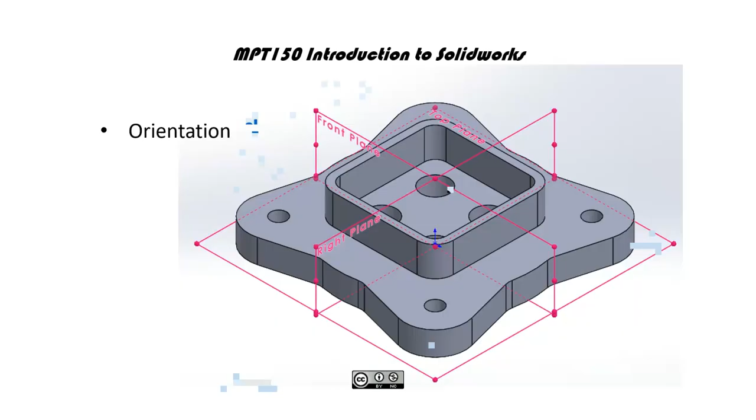Problem 4.6, millimeters, grams, and seconds. Part origin is located as indicated, so bottom center.

Based on the isometric, we're going to be sketching in the top view, using line, center line, circles, sketch fillets, extrude boss base, and extrude cut. All right, so all of our standard features are in play.

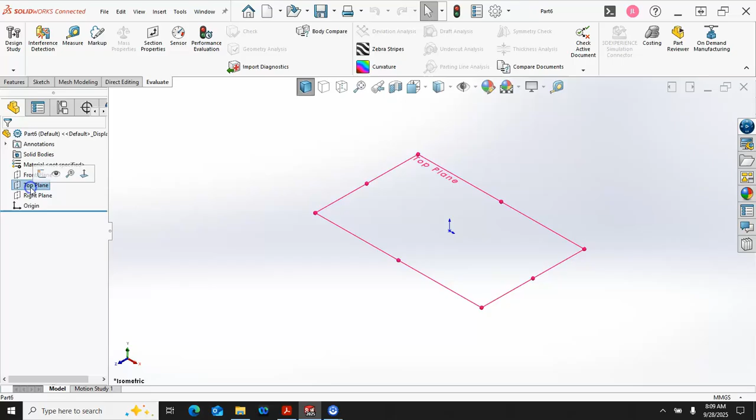We'll zoom that out a little bit. And then on the sketch, make sure we're going into millimeter, select the top plane, go into the sketch, and let's see if we do this.

All right, so the bottom view, the top view, I think I really just want to do that starter section. We have, we can do mirrors. Let's see, we have the fillets.

Let me fly this back in here so we can look at the dimensions. I got ahead of myself. So this has kind of a circle to it. I am not seeing... there we go, radius of 80 is typical.

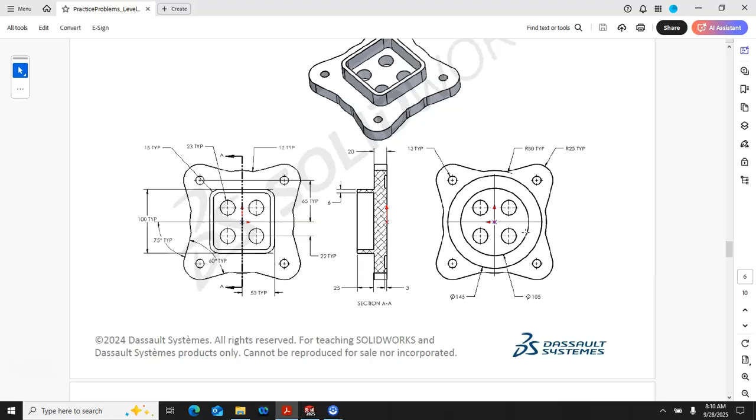So if we do this kind of butterfly shape first, radius of 25, typical, 105, 145, and then the top is the square. So really this view minus the boss and minus the undercut will get us a majority of the geometry. So the radius of 80 was what I was looking for there.

And let me expand that out a little bit. All right, so let's go ahead and put in the dimension.

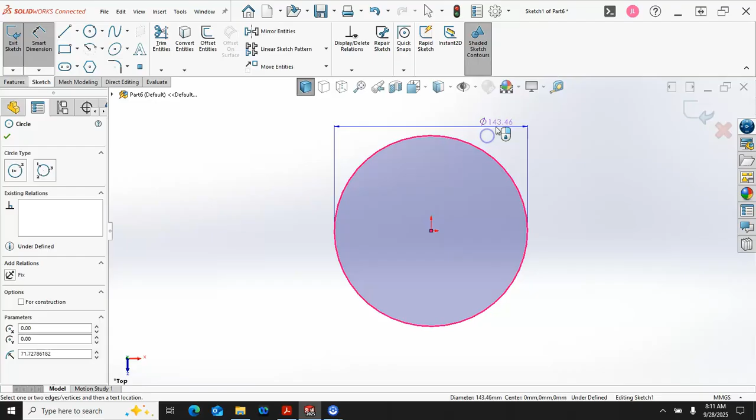I'm going to be working with contour and region. We'll go 160. Not going to let me select it when I'm in the dimension, but if I select it after I've hit escape, then I can switch it over to the radius.

The outside geometry then, let's go ahead with center lines because I'm thinking mirror. Don't think there's any advantage to treating this as a circular pattern.

So, oh, that's interesting. Oh, I switched it to horizontal too quick. I hadn't finished applying it yet, so that does happen if you get ahead on the buttons. So I need to make the next one horizontal, not try to make one that is already vertical horizontal.

All right, so the last one, after a few clicks, did update the center line. So let's see, what do we have? 65 typical.

So if they're going to say typical, we're going to go 65 and 65. And that's okay that it's to the outside, but if those are tangent touching, that could create a little bit of an overlap. Let's see, 15, no, that's not that one.

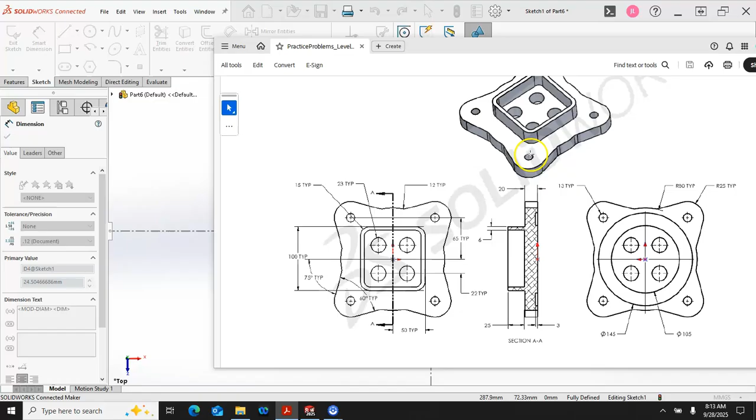Need to find the diameter, so 23 typical, but that's a lot bigger. And I'm not seeing any... there we go, 13. Hiding in plain sight again.

All right, so let's make sure that we are inside of the text box and we go ahead and accept. And since that was bigger, that gets it away from my geometry. Let's see, radius of 25.

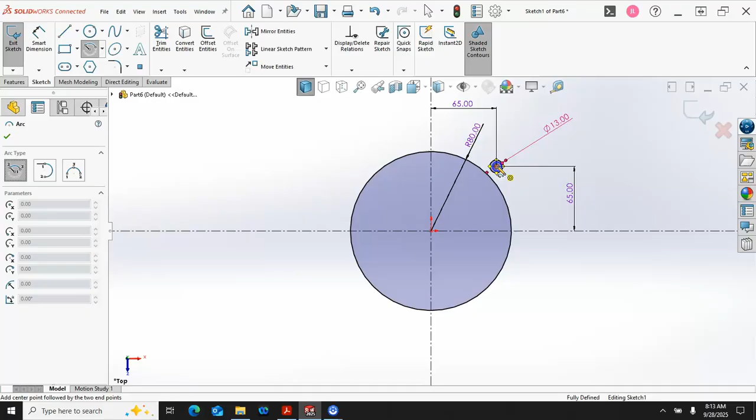So let's, I'll double check. I am center point arc. And so we need that partial. If it goes the wrong way, just keep dragging. And that will generate our shapes.

All right, so we're given 60 typical. So I'm going to probably need one more center line that goes into the geometry so that I can make those two endpoints symmetric.

So selecting the endpoint, selecting this construction line, center line, and making those symmetric, that will keep them in play. We do want it to be tangent, and I don't necessarily need to connect those just yet. We'll come back, and why don't we make them symmetric first?

So select, control, select, symmetric, and then if I go coincident, the other one should follow. All right, so our radius then becomes the 25, and pretty close.

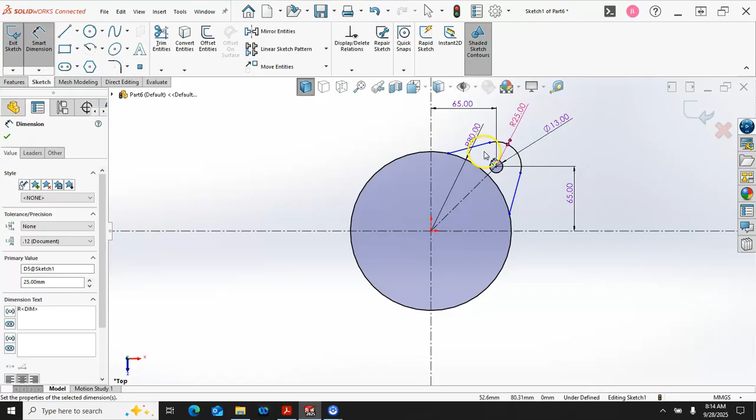Then two non-parallel lines for our dimension and place it. Those become the 60. All right, so it could have been a circular pattern for instances.

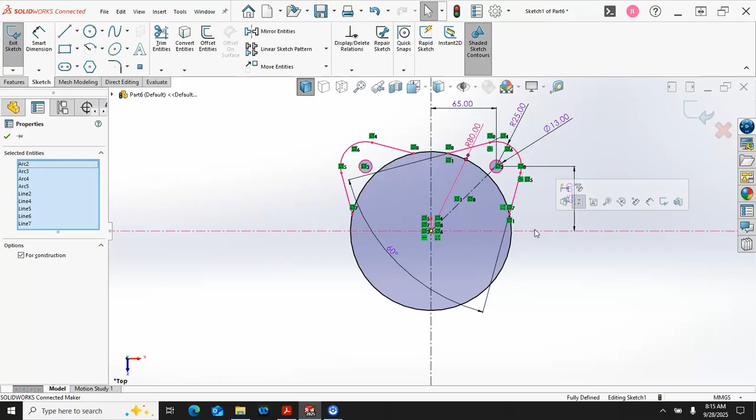I'm thinking mirror, so select. All right, this one's going to be a little bit more, so I'm going to go left to right so that I don't get that center line, my extra geometry, and then the horizontal center line will allow it to mirror the opposite way.

All right, so this participates here, and I'm not getting regions, but I'm not seeing any gaps. So as long as the extrude lets me have those regions, let's see, do I want to do the holes in the center? Yeah, we'll go ahead and drop those in.

These could be separate features if there was a chance that they would change, but 23 on the diameter, and they are, let's see, 22. Typical.

All right, and if you saw that little R pop up, that's because the center line is saying it's going to act as radial, or it's going to stay in radial until I either hit escape or close the command. So select, control, select,

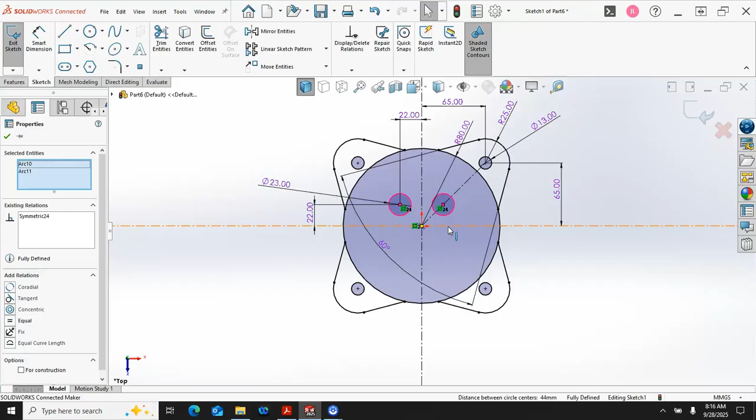and mirror. All right, now we have enough to extrude, and the selected contour and the center lines are not participating in this one. It is giving me the closed regions. So now we just need a height of 20.

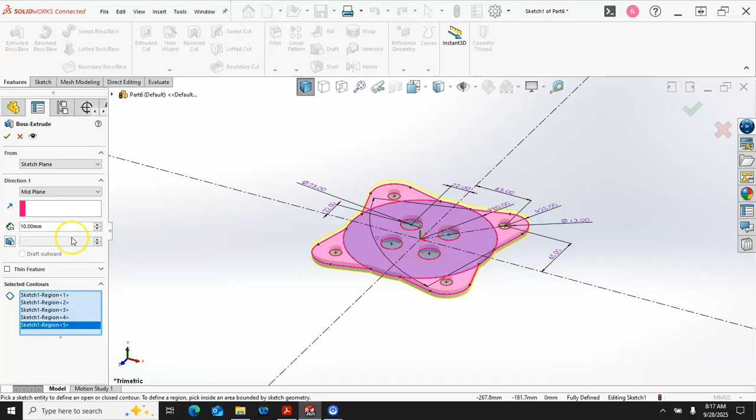Make sure that you're double clicking or clicking in the box, and that was on the bottom, so we want to make sure that it goes blind and up. So our end condition is set to blind, and then we are going in the correct direction.

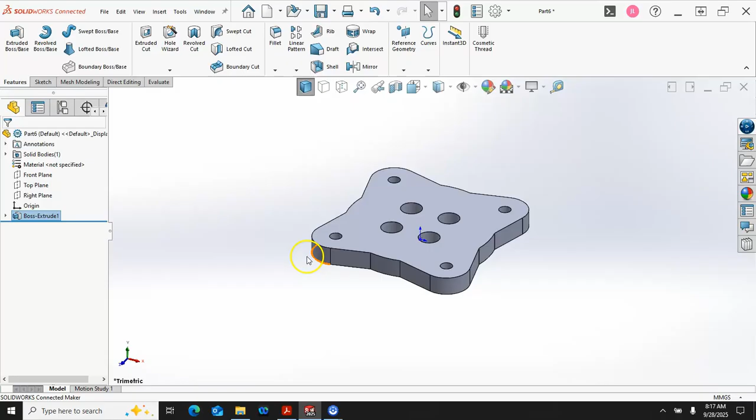All right, so this one I think we can probably use an offset. Did we get... and overall was the 50, so 100 by 100. I probably will just go with the center rectangle.

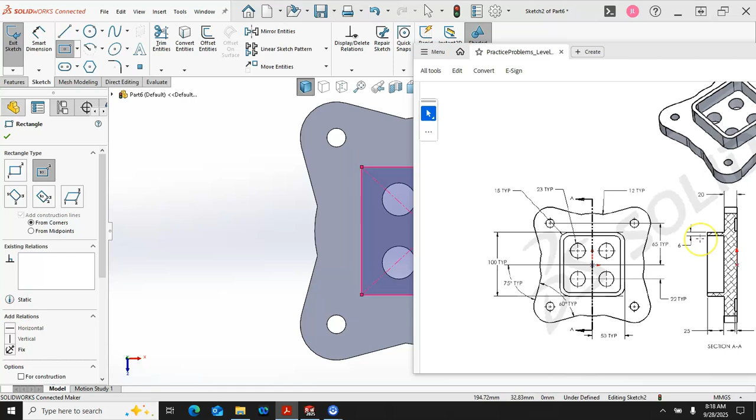And then the thicknesses, have the radius. Need to bring this one in 15. 50 is to the outside. Oh, 6 is in the section view. So okay, let's go ahead with that.

I think I will go ahead and put the radiuses in so it can calculate the internal for me when we do the offset.

So 100. Design intent, I will want these to always be equal. So rather than putting in the 2 dimensions, we'll just set it to equal. And then the sketch fillet gets the 15.

And yes, we know, and it's, well, sometimes it does that for every one of them. Okay, every other one of them. But basically what it's saying is because these center lines are providing the relation and there's equals, it is just warning that if you don't do all of them,

that it is going to shift, it is going to be skewed. All right, so let's select the chain, and that was the outside dimension. We want to go 6 millimeters, and then reverse the direction and hit OK.

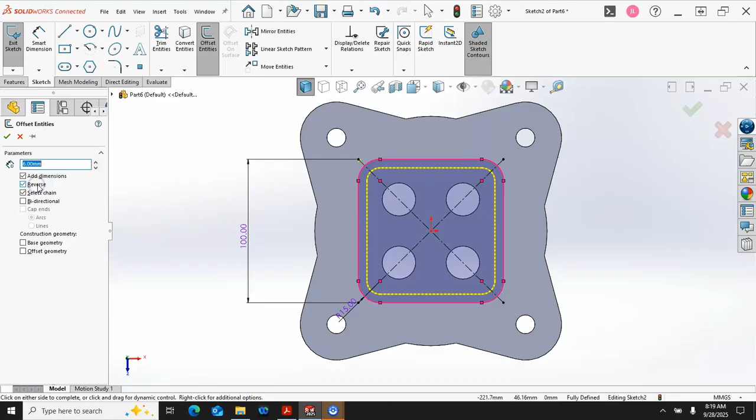So that is going to, let's go Control 7. I want to see my view, and that is going to go 25 millimeters.

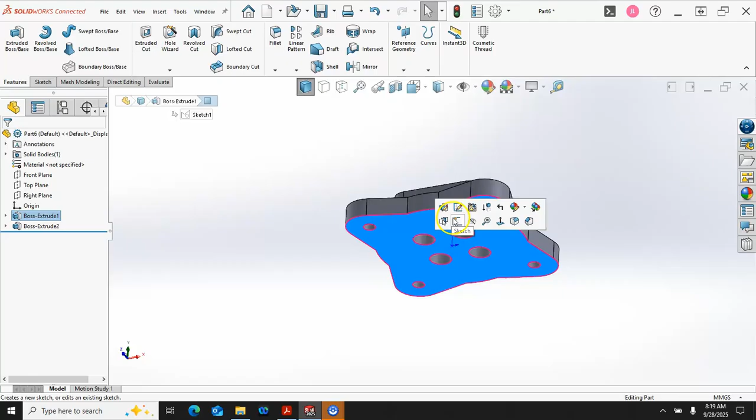All right, and then on the bottom we have the undercut, so picking the face, going into the sketch, we need 2 circles, and let's figure out which dimensions they've given me.

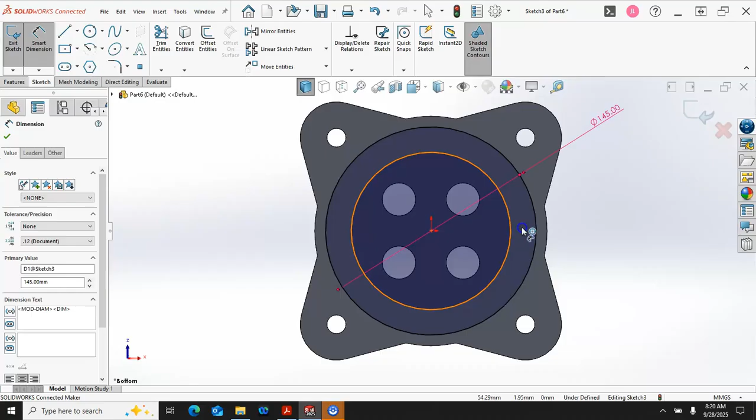So 145 on the outside and 105 on the inside. Okay, that looks pretty good. And then the depth is 3 millimeters.

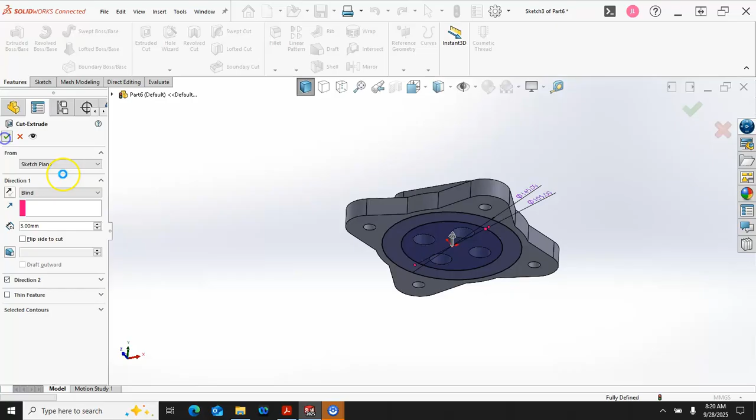Make sure that I'm doing a cut, instead of looking at the boss going, why is that a boss? Nope, it's not a boss. So 3 millimeters and accept and Control 7.

All right, so don't see any chamfers, any additional fillets or radiuses. So let's save, and we're going for 6.

And we have a value of 554,745. So 551,393. Okay, we're in the ballpark anyway. So...

Yeah, 23, 20, 12. Oh, there is just one more. Okay, so there was the fillet I was looking for. So let's go

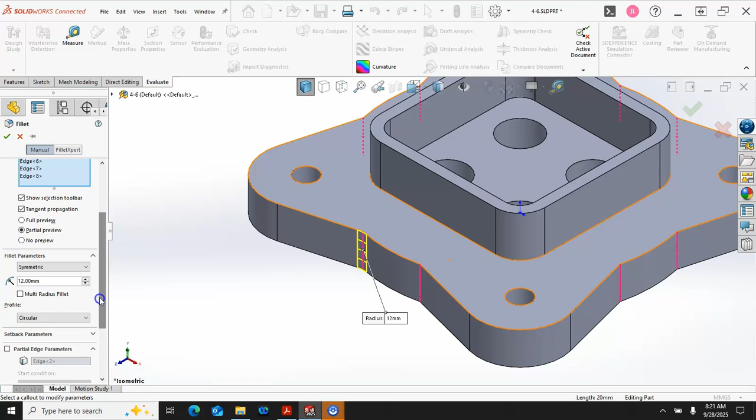fillet. Thought I was done, not quite. Let's make the next selection, and that will grab all of them that connected to start loop. And what was our dimension? I did get the 12 in there.

So make it a little bit closer, 551, 486. Yeah, not really enough, but 554. Time to go back and look at some of my dimensions.

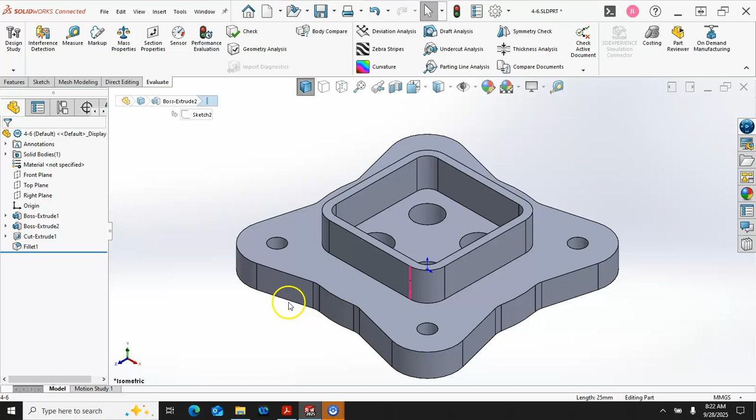20 millimeters, 25 millimeters, 6 millimeters all the way around. All right, well, we're going to count that one as close, but still looking.